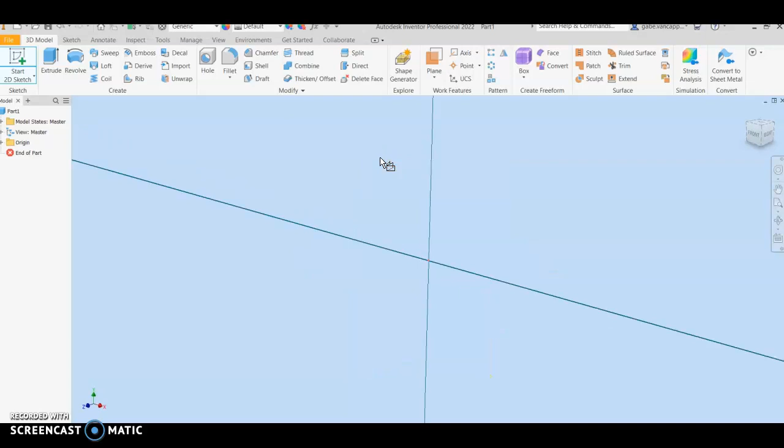So the first thing you want to do, open your part file, start a 2D sketch. You want to choose the XY plane, and then starting at the origin, you're going to make a circle. You can see it turns green when you're at the origin there. I'm going to zoom in a little bit for you.

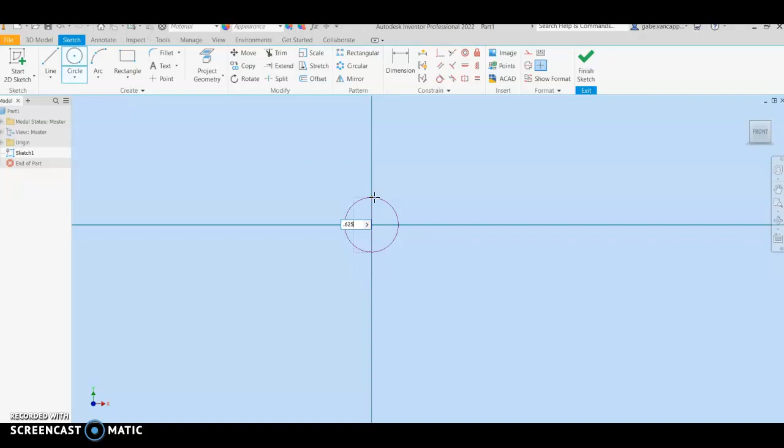And you want to make it have a diameter of 625 thousandths. Okay, and when you do that, hit front to rezoom it. You can see 625 thousandths. That's the diameter we want our handle to be. So let's right click, hit OK, finish 2D sketch.

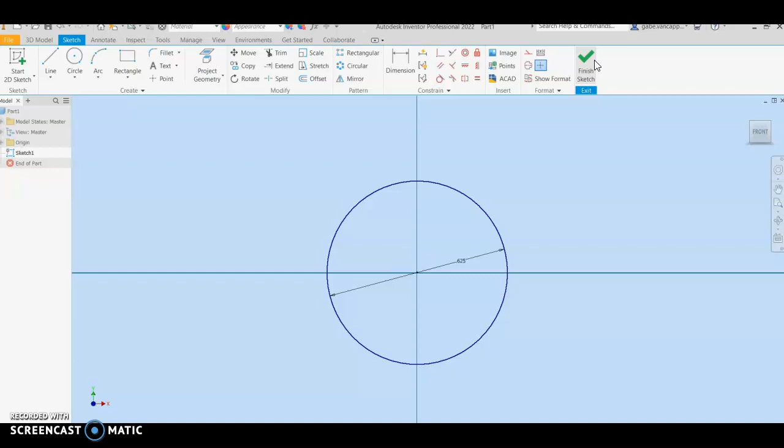And now we're going to extrude this. We're going to extrude it 8 inches. My computer's been a little slow, I apologize.

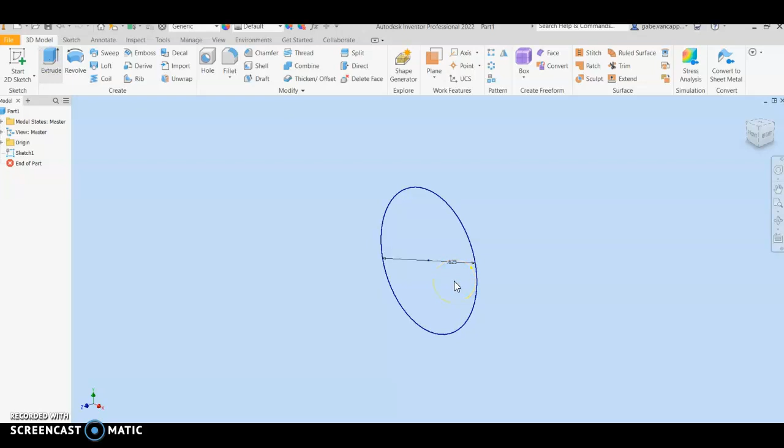Okay, so we're going to extrude. And it doesn't matter what direction you go in, forward, backwards. I like to do the symmetric myself. We're going to change that to a distance of 8 inches. Hit OK. Get out of focus. Click the home button to focus it back.

Let's go ahead and put a chamfer on each side because you wouldn't want a sharp edge on something like this, especially with it being a kid's toy. So we're going to do the chamfer. Click each end. And let's change that.

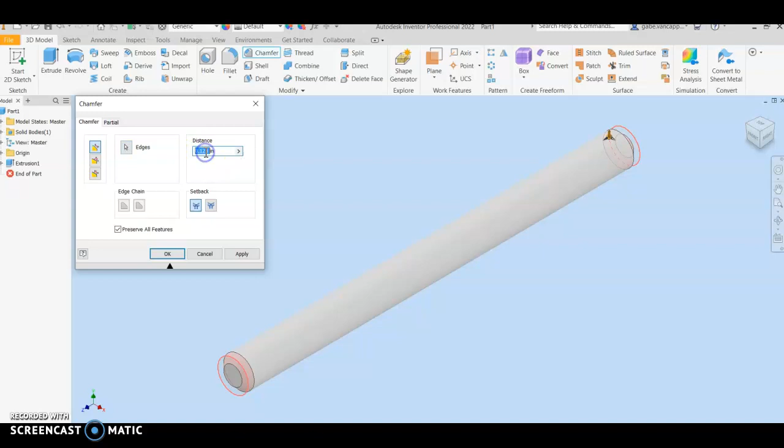It's 125 thousandths. That's an awful lot. Let's change that to 625 ten thousandths. So make sure 0.0625. Hit apply there. We've got the rounded edge.

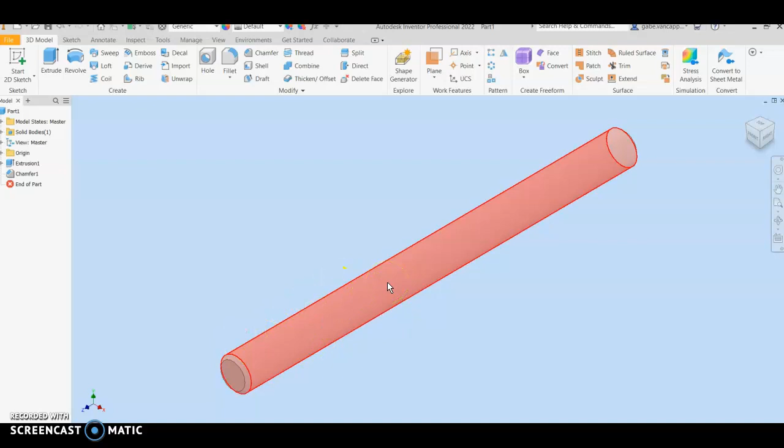Close that out. Okay, the next thing we're going to do, we're going to put a thread on this. If you remember the mallet head, we put a tapped hole in it where it was threaded. So we're actually going to put threads on this, and then we're going to do an insert in our assembly.

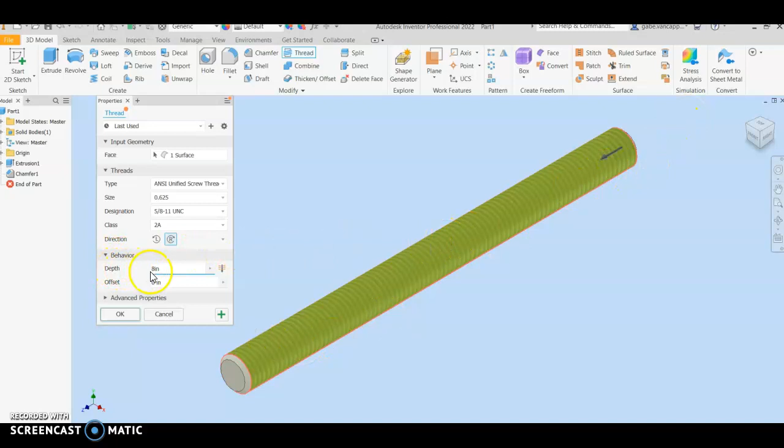So here's my thread button. You can click it, it's going to do the whole thing. Well, mine set up earlier for where I did it earlier as a practice run. Okay, yours is probably going to show up like this where it puts threads all the way down at 8 inches. So go down here to behavior and depth and change that to 1 inch.

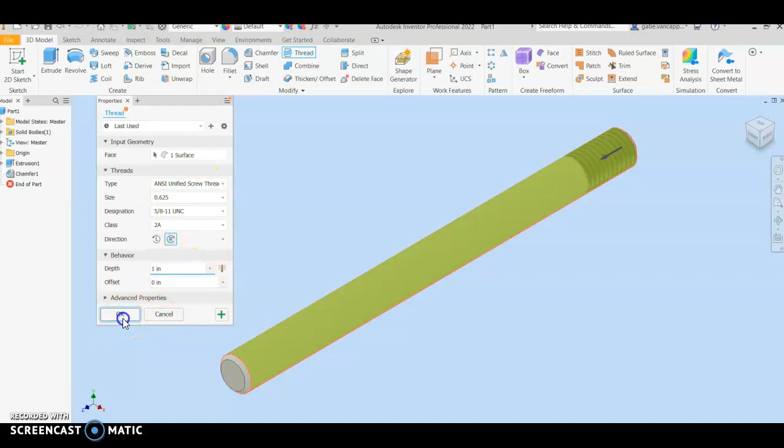And it doesn't matter if it's at the top or the bottom, it's going to be the same thing. Make sure your size is 625 thousandths. And then all this stuff, you don't have to mess with the threads and different types of things. So we hit OK there, that's threaded.

Let's change it from this generic. If you remember, the mallet head I made was a maple wood. This one, let's see. I'm going to make mine copper. It matches that kind. If you want to do carbon fiber, steel, you can do whatever you want.

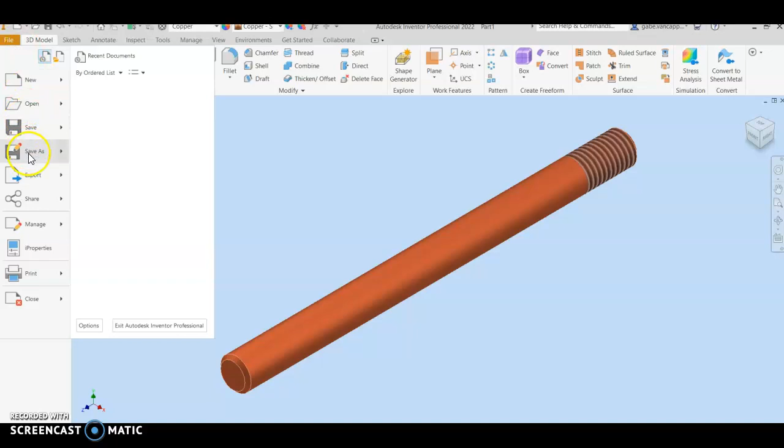Okay, so let's do file, save as. Make sure you go to your folder and you want to name it Mallet Handle and just hit save there. And that's it for this part. I'm going to show you how to go in and assemble it in just a second.

After you've made the mallet head and the handle, you're going to want to do another assembly file. We've done one of these for the pegboard. Some of us had a little bit of trouble with that triangle. And this one's a lot easier because we're going to use what's called an insert. So go to assembly.

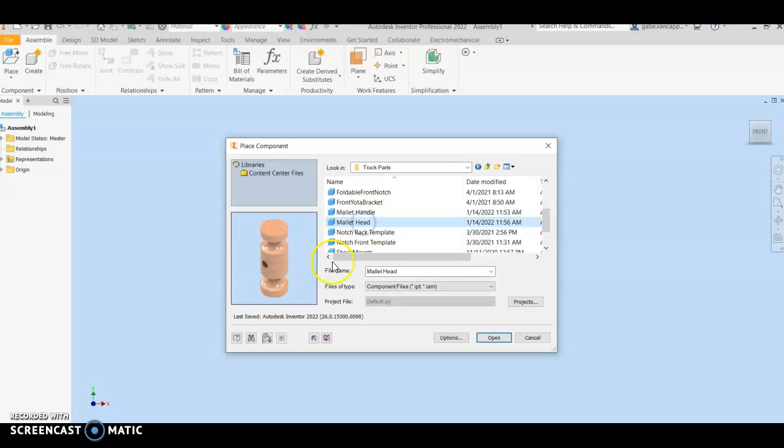And then we're going to place both items. So let's see, mallet head. There's my wood one. I'm going to place it. Only need one. So I'm going to hit OK.

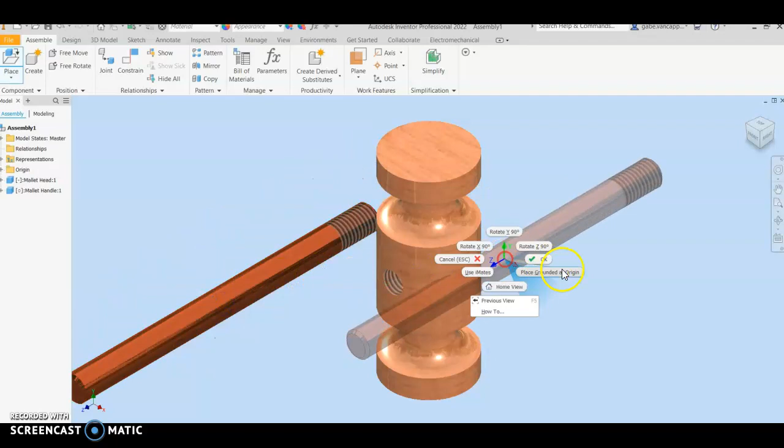And you can see mine's got like a reflective finish on it. I don't know about that. I think that's a little much for this. And then I want my mallet handle. Made that copper. We only need one of those. Let's zoom this. Okay.

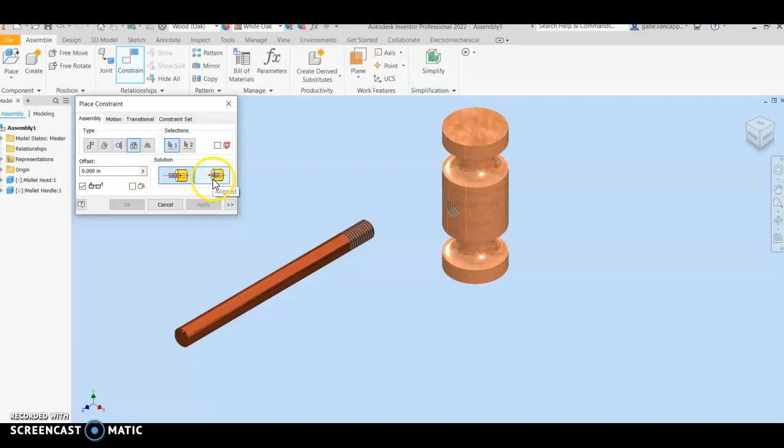And the other one we had to ground it because we had multiple pieces. On this one we don't really have to. Okay, so this time we're going to do another constrain, but this time we're going to do what's called an insert. In the past we did mate. You've also got angle, tangent. We're going to do an insert, and we're going to do the opposed one because it's still going to stick out. If we wanted it to go inside, we would do the aligned one.

So I want this through that hole. You can hear it makes that noise. I'm going to hit apply. I'm going to close that out, and I can drag it around. You can see that handle's not coming out of there. Okay. And I can flip it around and look at it all different ways.

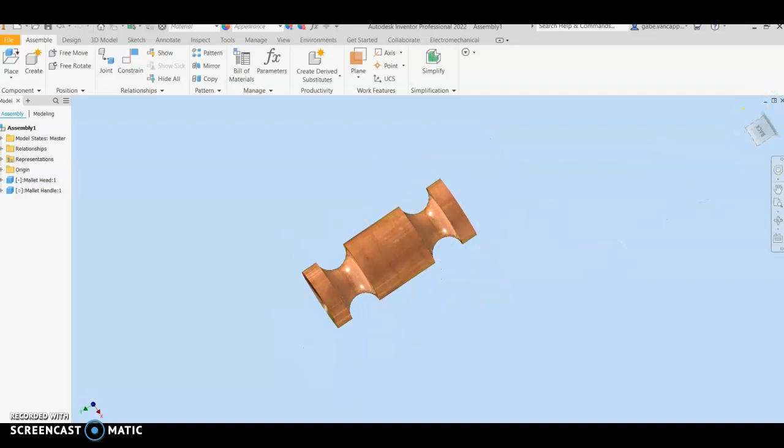There's no hole through the top. If I zoom in, I don't have any thread showing. So that's a perfect assembly file for what we're wanting to do.

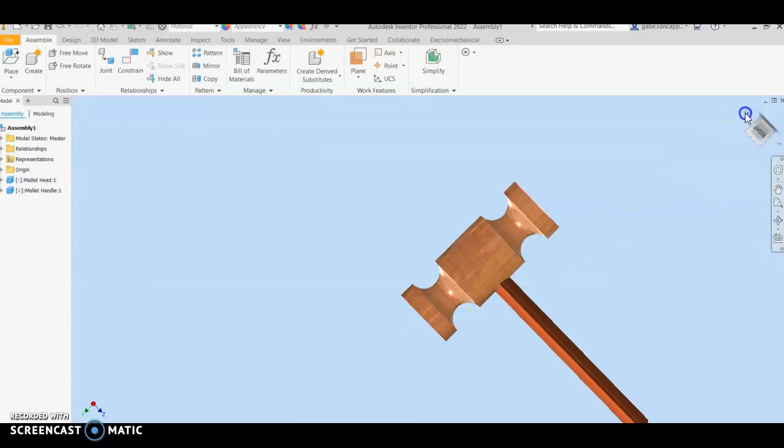You see on some of these finishes, I chose maple. See how it's reflecting like it's sitting outside in a parking lot. You can see a guy on a motorcycle there. Different materials do that. I don't know why it does that in Autodesk Inventor, but this is your assembled mallet

for your pegboard toy. At a later point, we're going to do some more assembly files, possibly a train, and then a playground assembly file, which is a lot of work, but it's really fun, and it's a challenging build. So with this one, this will wrap up the pegboard toy and the mallet.

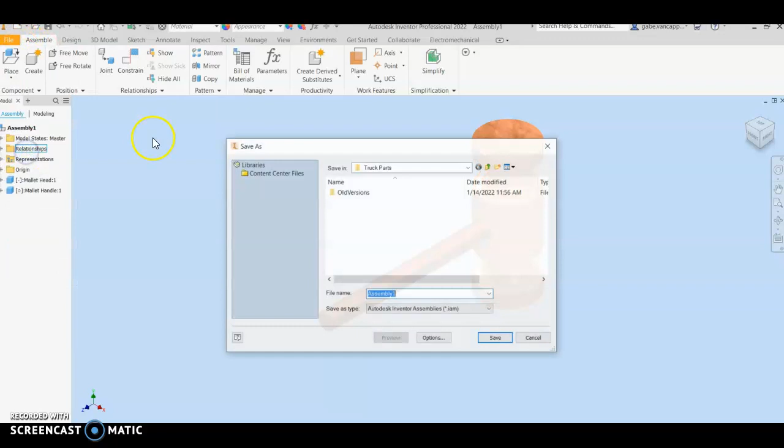Thank you. And go ahead and save it. You always want to save your assembly files. So File, Save As. Make sure you have it in your folder on your desktop. We want all your files to be there so we can get in there and check them. And let's just name it completed mallet and hit save.